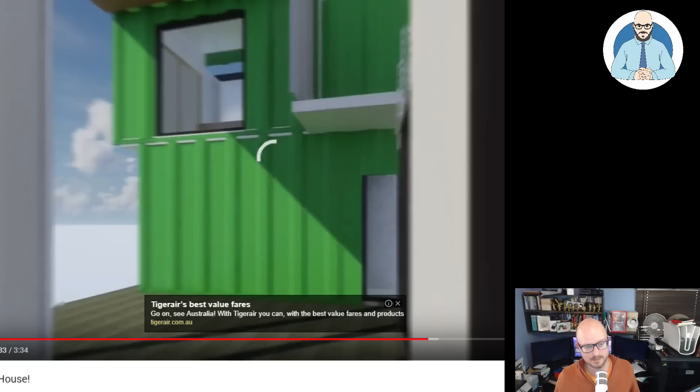And then how you would combine them together in different combinations to grow from a little starter house, adding additional units onto it to grow your house as your family's needs grow. Because there was a lot of stock available - just ex-mining stock from all the boom of the mining camps that could be repurposed.

I don't know why we need an innovation lab, really, because we've got a lot of expertise in this. There's a lot of companies that have done work in this.

But anyway, Ms. Andrews said there was a massive opportunity to boost the building and construction industry and potentially create an estimated 20,000 new jobs. Okay, I challenge that, I really challenge that. This shows a lack of understanding of where these things have come from and how they're manufactured. Okay, and anyway, I'll get into some of the issues here I'll discuss later.

The industry minister added there were social and lifestyle benefits to tiny homes, noting we're also very mindful of the cost of housing. Tiny homes can cost well over $100,000, but an entry-level new home with toilet and shower can sell for as little as $40,000.

Yes, because they're called caravans. They are called glorified caravans. That's what these are - just timber and steel caravans with normal housing elements added to them. That's it. Okay guys, this is not innovation. This is the problem. People think this type of stuff is innovative. This isn't innovative, this is derivative. This is not innovation, I don't care what anyone says.

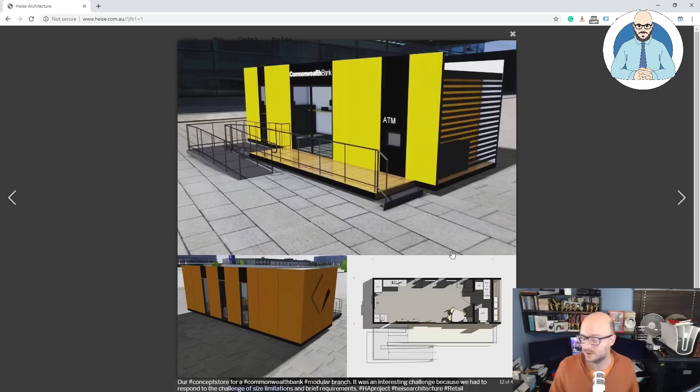Here's a little concept we did for CommBank, just a little modular emergency bank branch. And then we've got some of these big mines. Large-scale mining projects through to smaller housing projects, large modular buildings, thousands of square meters, fabricated here and then transported to remote parts of Australia, North Queensland, and Indigenous housing. We'll look at that in a bit more detail.

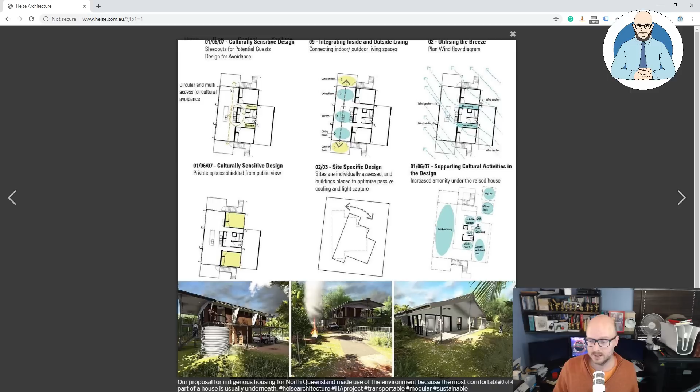And this is why I don't know why these people are so obsessed protesting these mines. If you go out to these places, if you go to remote Queensland, to the basin, there's nothing there. It's just scrub bush, a few animals, and people are bored out of their mind when they're working there. But whoop-de-doo, they want to protest in Brisbane.

One of the issues, and this also goes with tiny housing depending on how you build it, is getting it through. Here we had maximum clearances for tunnels on the site that we had to make sure the larger modules would fit on, so we'd prepare these type of drawings to show that.

That's an issue that needs to be taken care of. You can have the tiny houses that fold up, you build it in parts, then build portions of it on site. Again, that's not that innovative. People have been fabricating trusses and timber frames for decades and trucking them to site, then installing them. That isn't innovation, that's normal.

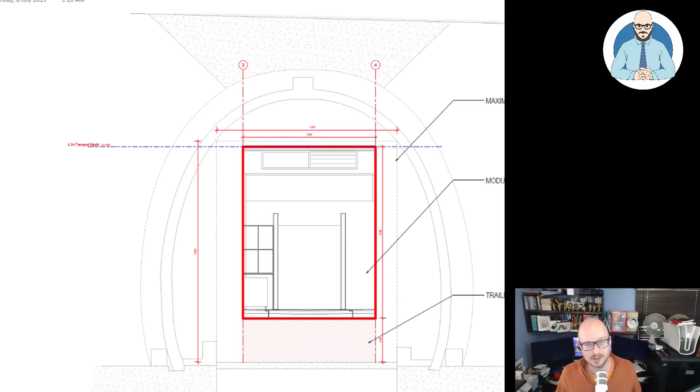What you're doing is you're taking the construction of this project away from the site. You're taking it to a remote location. You're adding additional steel. Let's have a look.

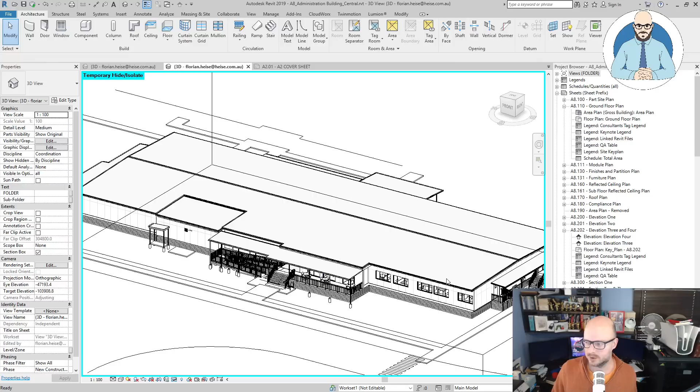Jump over here. So this is the admin building I showed you, a big office building on a mine. This portion here is quite interesting because that was the server room, so it had to have all the... it was actually a concrete floor prefabricated down here in Yeronga. But each one of these modules has all of this, and this is the steel structure.

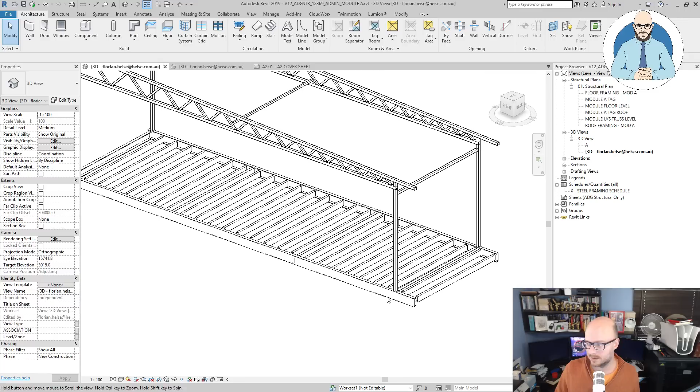So you've got some UCs, parallel flange channels, PFCs, running either side. You've got SHSs strengthening it, and then you've got the floor joists running across. You don't put this together with a screwdriver, like he said. This is a volumetric one. Then you've got all the framing out. This one was large to get the open span for an office.

You can reduce the sizes somewhat if you've got walls there to strengthen it up, some framing, that type of thing. But generally, the rule of thumb when you're building one of these buildings that has to be transported is you need about 30% additional steel, because of the movement on the structure as it's getting lifted, craned, moved on the truck, pulled apart. Even for the little ones, that's all additional resources in there.

Remember, you're comparing this — essentially you're building a caravan, guys. These things are caravans. Building it on site, you'll replace all of this with an in-ground slab. Then you won't have to have any of the galvanizing, you won't have any of the inspection issues. Underneath, sure, you have to inspect the slab and protect it for termites, but it has some advantages too.

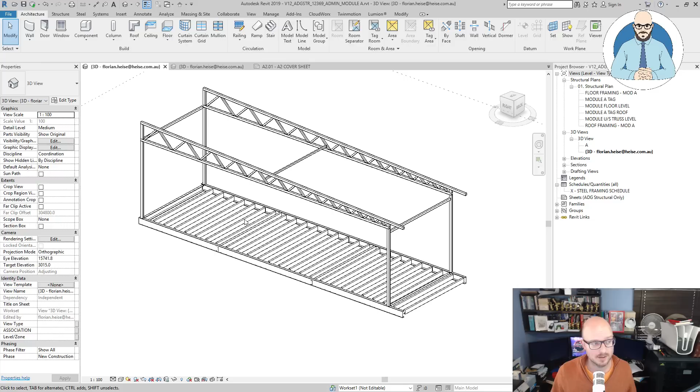We'll jump back here, have a look. So some of the housing stuff we worked on, we did lots and lots of modular mining stuff, tons of it. Back in the peak, I was covering the costs of my business. We got up to 12 staff at one stage, 12 people, and we were doing concept after concept after concept.

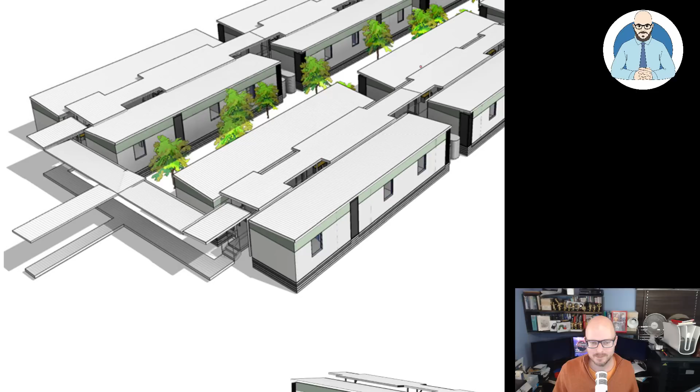And every man and his dog would be trying to make their fortune getting these things manufactured overseas in Southeast Asia, where apparently there's export opportunities for Australia — export opportunities, like what we saw in the article here. No, I doubt it.

The guy who was prefabricating using robotics and super precise systems could almost meet the rate of the imported Chinese product — entire modules. Because he could take progressive payments, differently to the Chinese manufacturers, you'd be risking more, having to pay a whole lot up front to get it over, whereas he could do it here and have better quality. But that was because he was fabricating it using robotics.

He had his systems really refined, and he made his little bathroom pods fantastically. Whereas everyone else is manufacturing it using traditional methods, where it just runs on a conveyor system, they push it with a bunch of wheels, put down the frame and build it up. They get the trades in and do it one at a time — rather than driving to a site, they're doing it here and finishing it off in the factory, which is fine.

But assuming Australia is going to have a chance to compete with Asia, I think is a bit far-fetched, frankly. I think it'll be the other way around. Our technical ability and quality could give us an edge, maybe with large multinationals going overseas, mines being developed in Southeast Asia, perhaps. But even then it's a challenge — often you'll find Australian manufacturers will source components or portions of the building offshore and bring it here.

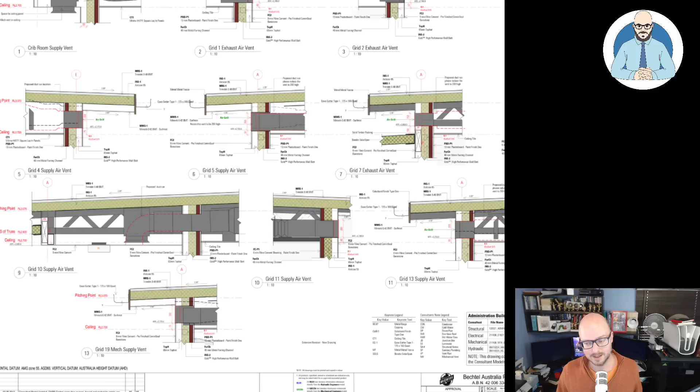So it's just something to think about, guys. I wouldn't be pinning 20,000 new jobs on this sector, not at all. I don't think as much as people would imagine. So we looked at that, we looked at large, really big camps with all of these, just reconfiguring them.

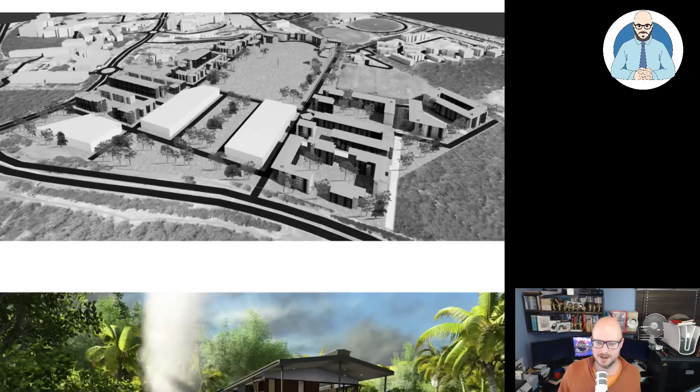We did a proposal, a Commonwealth Games option, to build all the houses out of modular units as well. I'm glad that didn't get up, to be honest.

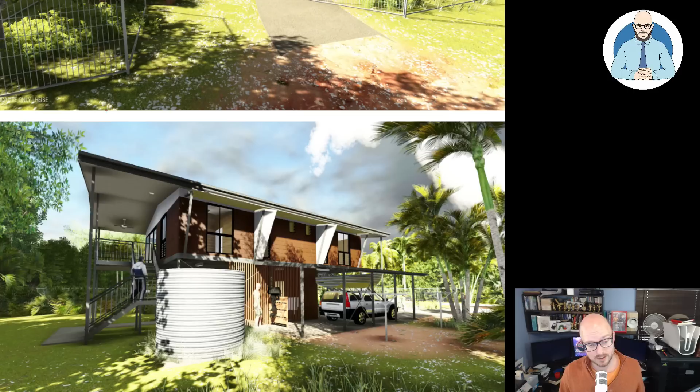We looked at indigenous projects for bridging the gap, building modular and indigenous housing. That could be fabricated, with some elements of construction done on site, and as well as having the house, you'd have all the space underneath to occupy, because particularly in northern Queensland, you're doing most of your living outdoors.

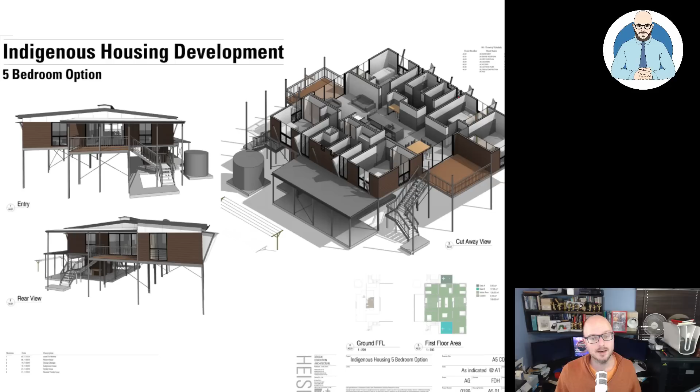Just with the way it is, we designed it with multiple entrances and exits, the ability for little sleeping nooks to be created everywhere. Unfortunately, it didn't go ahead.

But you see, here it was built out of several modules, and then certain other portions were built in situ. But what about, here we can have a look at this, and I'll just jump to, you can see it in Revit here in our program. It's been a while since I've opened these files.

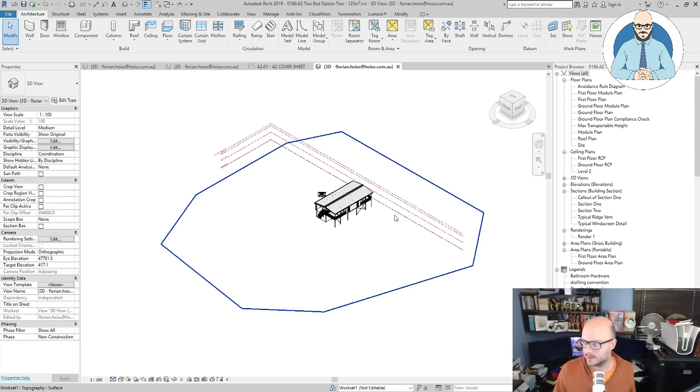They're like 6 years old, so the text is all a bit chunky, but you can see here. Hang on, let me turn on this section box, guys. Can you see that? Good, that's working. So we'll zoom in.

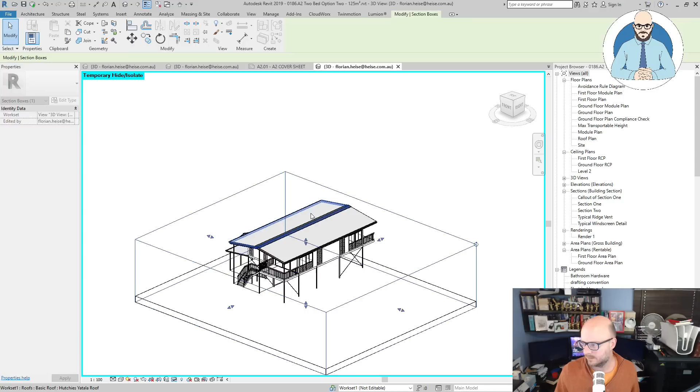We did a lot of different options of these things. Actually, this killed us to get it done in the time frame. So the idea was you'd have decks either end, so you could get ventilation through. We'd have louvers here, so you get ventilation all the way through.

This area could be a sleep out, this could be a sleep out. And you'd have the ability to have privacy from people not seeing family members go into the bathroom, trying to address some of the cultural issues. It's very difficult.

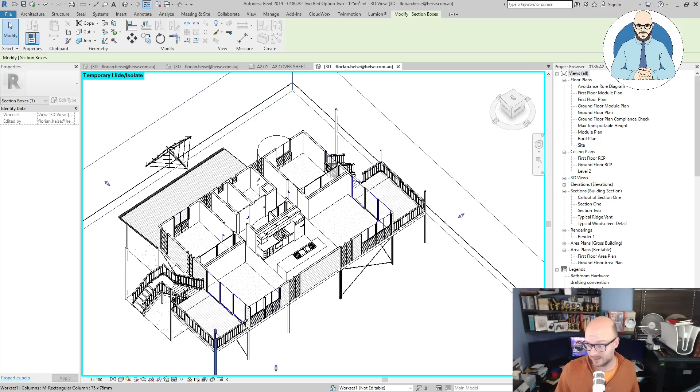So yeah, there you go. This was a 2-bedroom modular option two with little spaces for sleeping out, and we made more and more options. Here we had a 4-bedroom option as well, you can see here, 1, 2, 3, 4.

But what about tiny houses? Now we were invited to do a submission for a golf course who wanted to build some hotels. So we did a workshop where we got the whole team together. We only got some of the people in here, but still.

And we just tested different little options to build a tiny little hotel module that could be fabricated off-site and plonked on-site with in-situ elements built. And we just chucked any idea out there as we could, and that's kind of what you do.

And then we came up with these type of little views here, as a concept with in-situ elements built. The idea was it'd be like a little weekender where you could relax and just look over the lake and just enjoy it. Let's have a look around here.

I'll just take you for a little walk. You can see it was very simple. How the entry, and this would be done in situ, where this would be built as a very simple kind of shipping container-esque type of thing. You come in here, you've got your little bathroom.

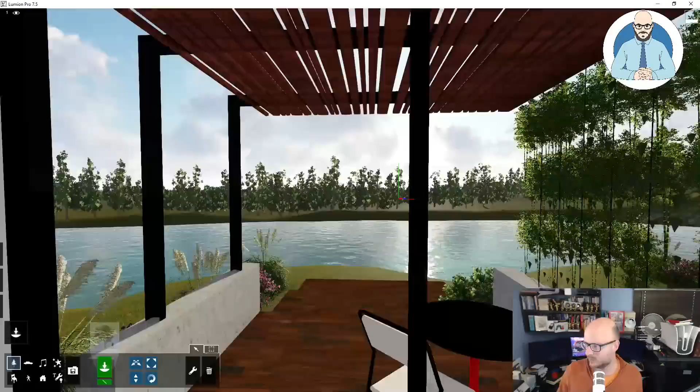Did we put the shower in? Oh, cupboard, yeah, sorry, a little bathroom back here with a little clothes store, and you'd have a little bed coming off there, and just this outdoor area here, looking out over the river or the lake, where this would be built in situ, and you'd have plants grown up to make it look nice, modern.

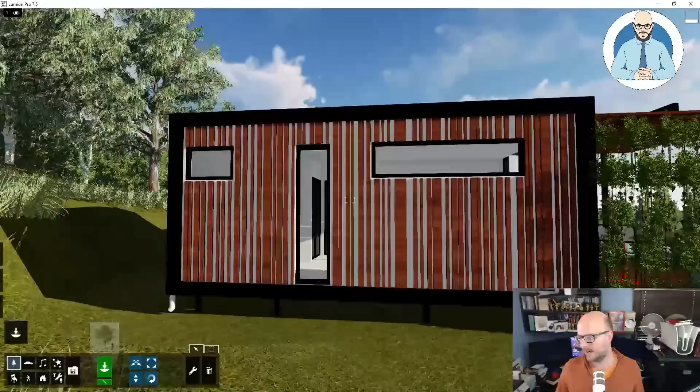And the idea was just using FC sheeting behind with some battens fixed to it, which wouldn't be a waterproofing issue. I would literally just glue them on there with 3M tape and just paint them, so there's really no waterproofing, it's a real simple idea. And then building it as a tiny hotel pod. So yeah, that was what we looked at as an option there.

Now, I'm critical of this because claiming that there's going to be export opportunities in Asia Pacific, I would challenge. I would say our industries aren't as competitive. I think we're gonna hit a lot of competition. Sure, maybe it could work, maybe it could.

The thing is, there are a lot of people already doing this here in Australia. There's a lot of manufacturers already doing it, and we work for them.

There's a lot of school buildings done like this, and there's definitely a place in the market for it. But thinking it's going to be a solution for all housing, I think is short-sighted. I'd like this money, rather than focusing on export opportunities, to instead focus on freeing up legislation at a council level to allow people to build what they want.

If people want to have a little tiny house at the back of their yard, why not? Let them do it. If you want to reduce the cost of housing, remove some of the red tape with regards to construction. What I'm saying is maybe get rid of insulation requirements in buildings, maybe let people be a bit colder if they want to save that money.

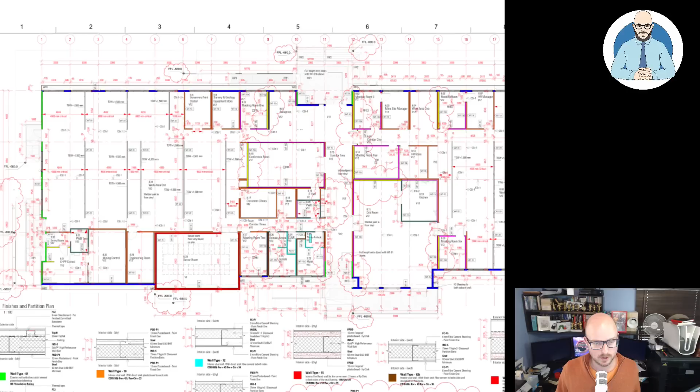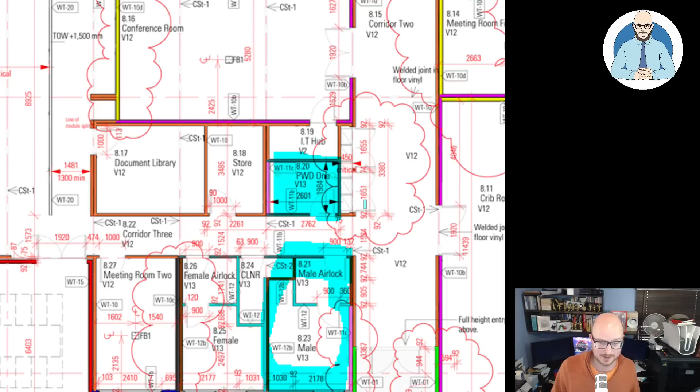You can see, okay, this is a normal toilet here, this is like multiple toilets, and this is a disabled toilet here. When we have all the turn circles into it, it's several meters - what is it, 2.7 by 1.6? Oh, that seems a bit small. 2.7, 1.6 is internally, okay, a bit bigger. So that's the thing, you need a lot of space for these bathrooms. This isn't just like a little 900mm wide bathroom like you're going to get in one of these things.

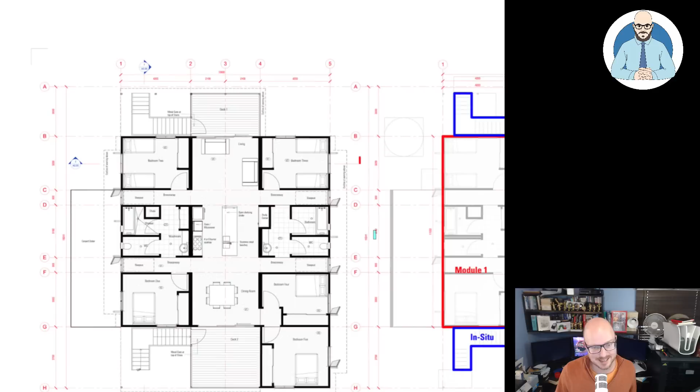So the tiny houses, sure, they have a place, but with an aging population, they're not going to meet the performance requirements that people are going to expect either. Here you go, this is what we did here - this isn't compliant either with regards to aging in place. It's just not enough space, you need to redesign it. And there's also another push coming from government to implement that, to have accessibility in our housing.

So what are you going to do? Do you want the tiny little houses that have got no chance of complying with the legislation? That are going to be super small and cute and everyone loves them, and also, I would say they're not fit for people to age in place. I'll bravely make that claim now - they're not fit to age in place. You have to adapt them, they're not going to be big enough.

Sure, maybe you could design - you could probably get one working, but it's going to just be a big bathroom and a bedroom. It's going to be a studio, that'd be the way to do it. That'd be different to this. You couldn't get a house like this where you'd be comfortable living in and getting the most efficient use of space in the middle of your life and age in place.

In there, you're going to have to change, which, okay, if you want to do that, that's fine, that can happen. You couldn't raise a family in a house like this - I couldn't have 4 kids in a house like this. Probably for a young couple or a single person, you could.

So guys, let me know what you think. If you're a fan of tiny houses, if you want the government to just let people do it, if you think it's worth the government investing in this sector.